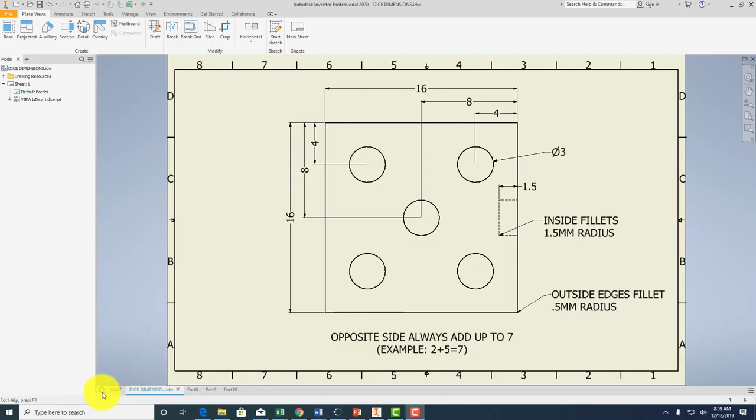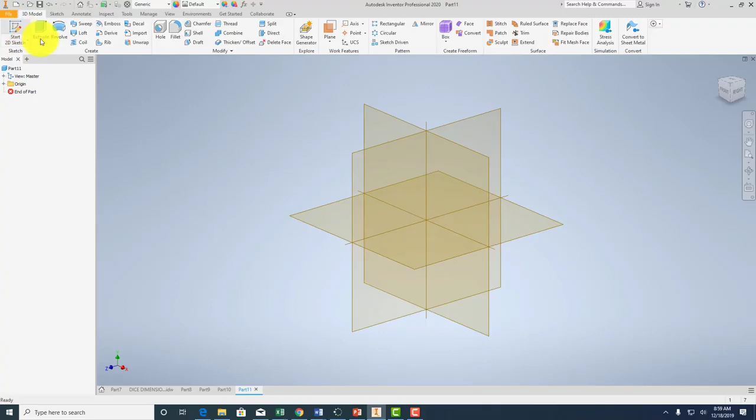So let's go ahead and start. I'm going to go back to home. I'm going to go to this gear and change my units to millimeters. Go to part. And the first thing I need to do is start 2D sketch. Now for the dice, it doesn't matter which work plane I choose, so I'm going to choose this work plane here.

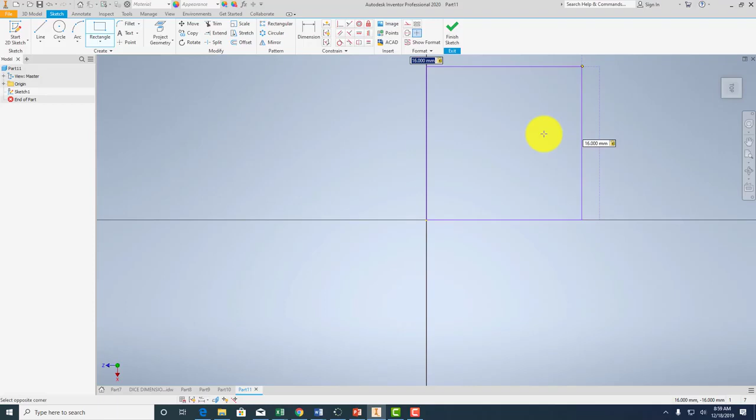I'm going to draw a rectangle from the origin. I'm going to type in 16 tab, 16 tab, and I can switch between these by hitting tab, and when I'm happy with the size of this, I'm going to hit enter. So now I have a square that's 16 by 16. All the lines are in black, so that means the computer is happy. So I'm going to go to Finish Sketch and extrude this up. I want this to be 16,

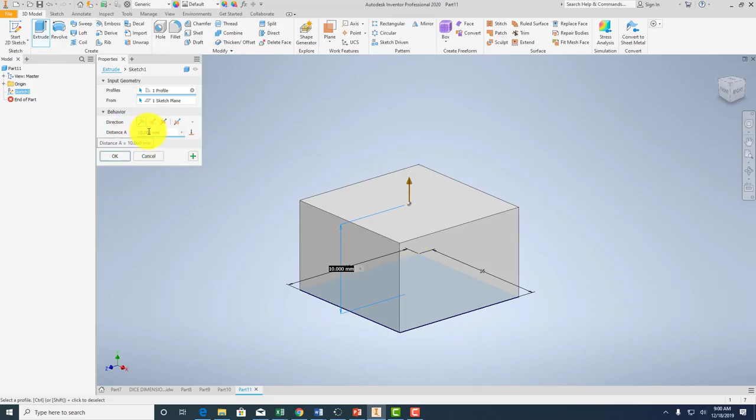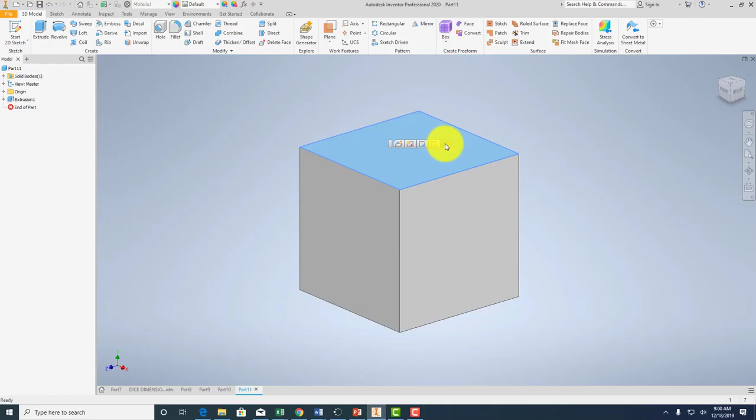and that looks good. Next thing I want to do is I want to go and select one face of this shape. We have the ability to edit the extrusion. We have the ability to edit the sketch. But what I want to do is create a new sketch on the surface. So now I've created a sheet of paper on this surface that I can draw on.

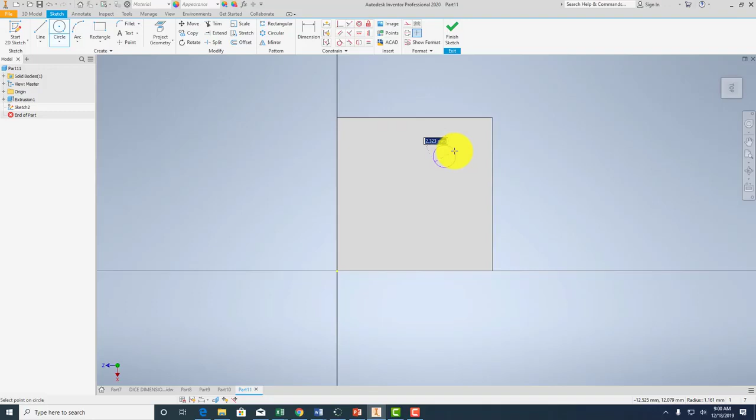I'm going to draw side 5, and what I need is 5 circles. Now while you're drawing these, you can type in 3, and it will lock that into a 3 diameter. Now you may notice I'm not putting these in any particular spot. They're certainly not the correct spots. So I'm going to place them using dimensions.

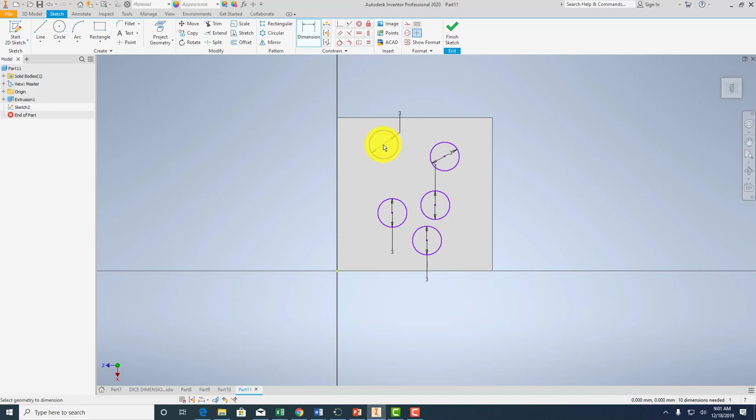So I'm going to click dimension, I click the center, I click the top edge, and then I place the dimension with a third click, and then I type in 4 millimeters, enter. I do the same thing from the center to the edge, place the dimension, and then type 4. Now what's happened is I've dimensioned this circle to be placed 4 millimeters from the center of the circle to the outside edge and 4 millimeters from the center of the circle to the top edge. And you'll notice that it's turned black, which means the computer is happy.

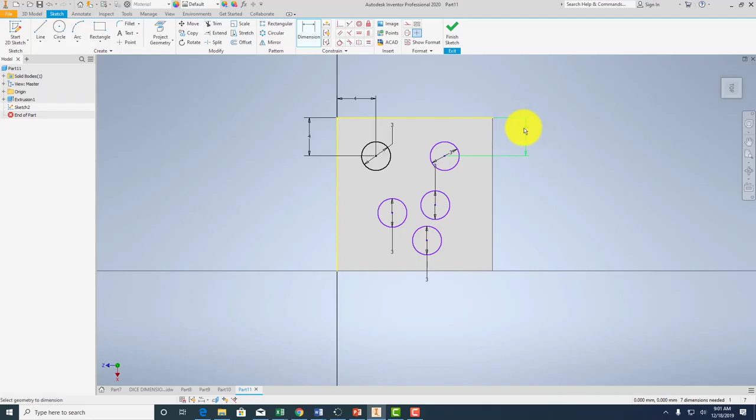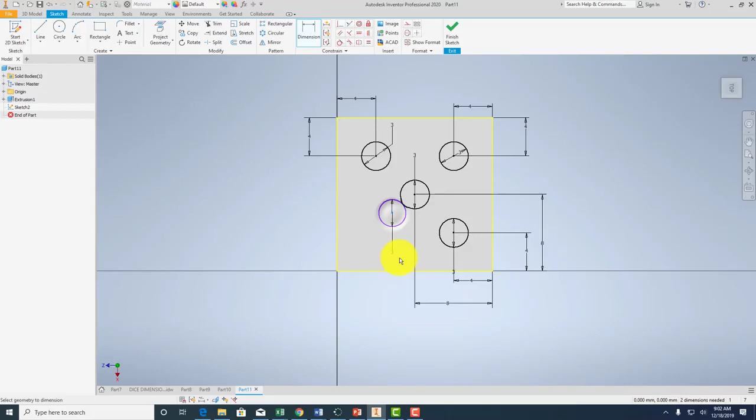Alright, so we're going to continue this. This is a really quick process. 3 quick clicks, and I'm going to make this my 8. And from here to here, also 8. So 3 quick clicks, then type in the dimension that you want. Center to the bottom, 4. Center to the outside edge. Click to place the dimension, type in 4. And now we have this dimension just the way we want it.

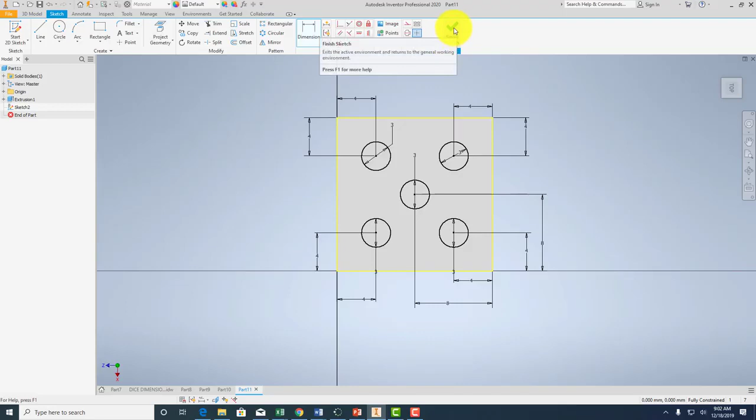Each circle is 3 millimeters diameter. The outside circles are 4 millimeters from every edge. The center circle is 8 millimeters from all edges. And I'm going to go and finish sketch. Next thing I want to do is I want to extrude these circles.

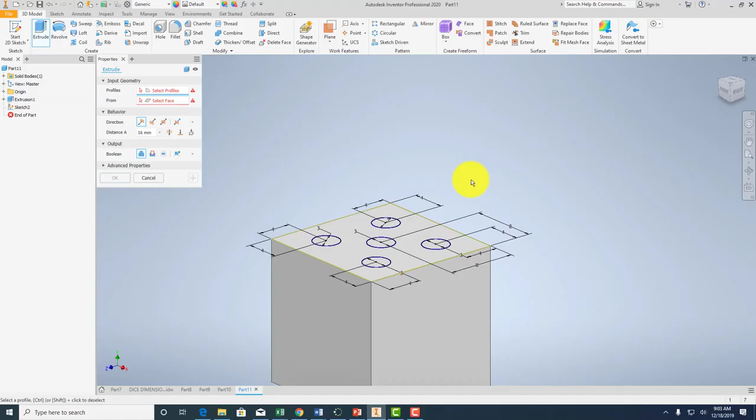So I click extrude. Now, when I first made the cube, it chose the profile for me because there was only one profile. What we're looking at now is at least 5 profiles and really 6 profiles. We have this profile, which is highlighted in green, which would be the outside of every circle. But what we want is the inside. So what I like to do is zoom in and click when the circles turn green.

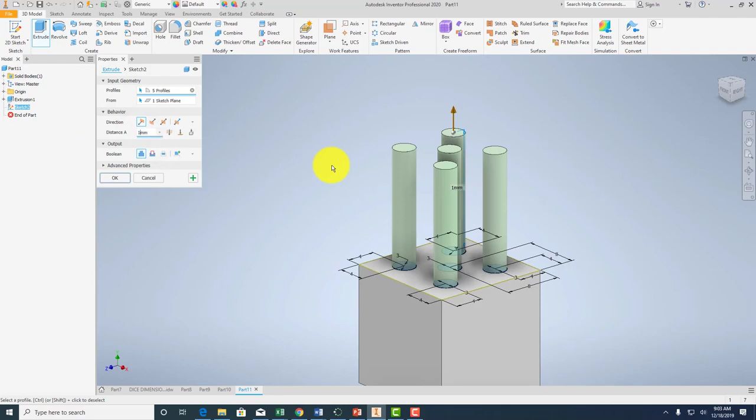All right, so those are our profiles, and when you look at this extrusion, you can see that's clearly not what I'm looking for. What I want to do is I want to change the distance to 1.5, and I want to change this to instead of a join, I want it to cut.

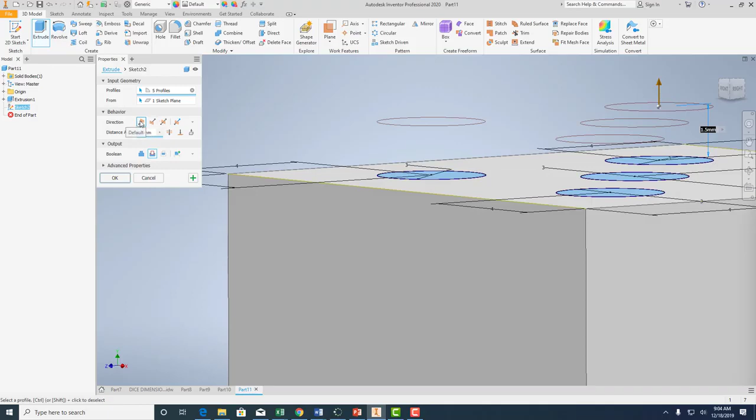Now, you may not be able to see this, but there is a red circle above this. Right here, there's a red circle above my profile. That means that it's cutting upwards. Well, that's not going to work. We want to flip. So right now it's set to default. We want to flip it so that it's cutting into the object. So what you're going to do is you're going to use the same process for all 6 sides and make your own dice.